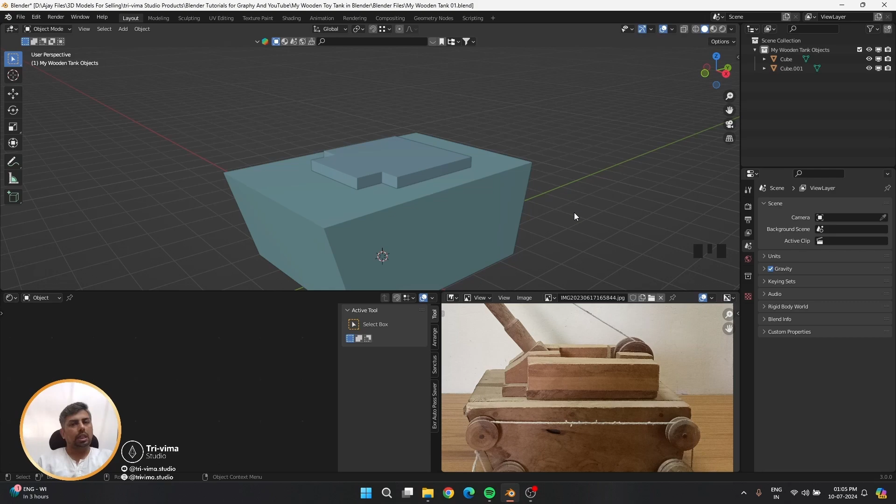There is a very simple way to create the next upcoming model, which is simple but a little smart. So let's try. First, I'll select this object here and switch on the wireframe so I can see the structure of it.

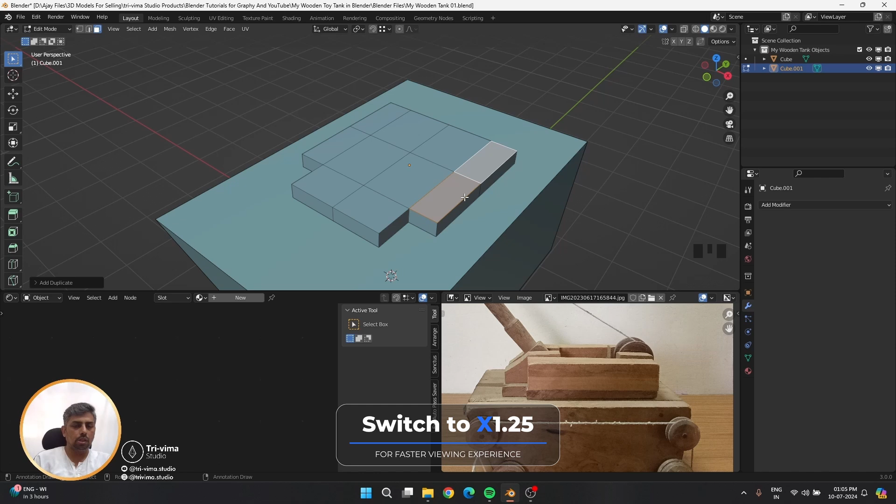Go to edit mode on this object, then go to face mode by pressing 3, select these faces, and press Shift+D. Don't move your cursor and press escape. This creates a duplicate polygon placed in the same spot, still selected. Then press P to separate the selection into a different object.

Go to object mode and select the new object. Now I can put a mirror modifier on this and see there's a correct mirror here.

Now I need to remove this middle edge by dissolving it. Then I'll use this section so I can see this one properly.

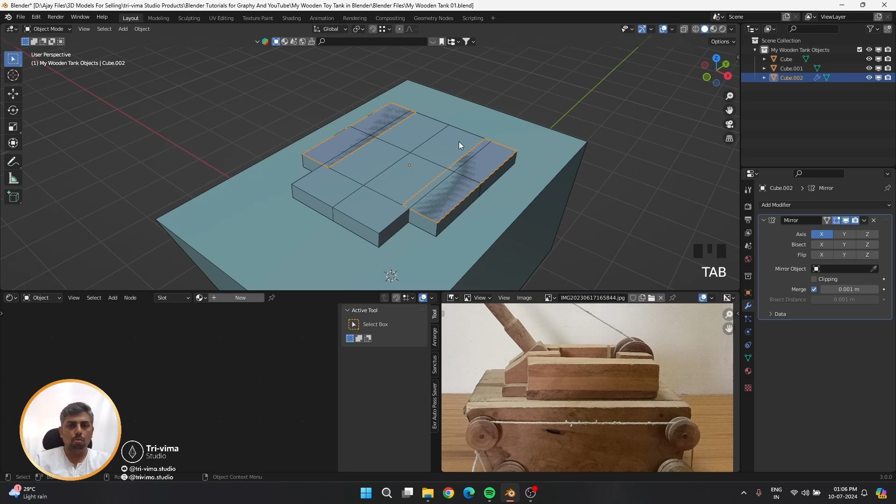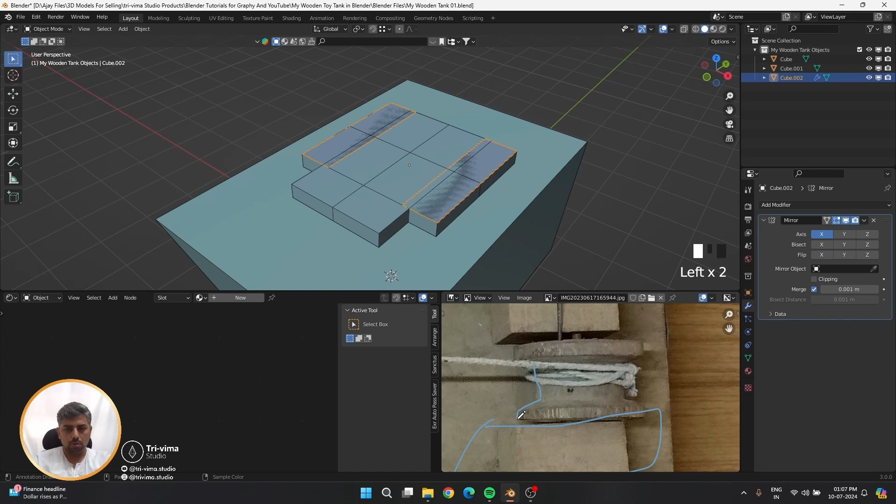See the other reference image also, this one, so we can understand what is going on. I need this piece, this piece, and this way the pulley is. You can see the pulley, where this bed gives space to tie the rope, and this is the structure.

So this way something we have to make. First we deal with this, then the pulley. Let's start - I did something little here. Now I need the same edit poly for this, and I need one more polygon for this and this.

Select this, Shift+D, go to X and jump it here. Let's snap this with G. Then again, snap off, GY and push it here. Position it like a square - it should appear like a square.

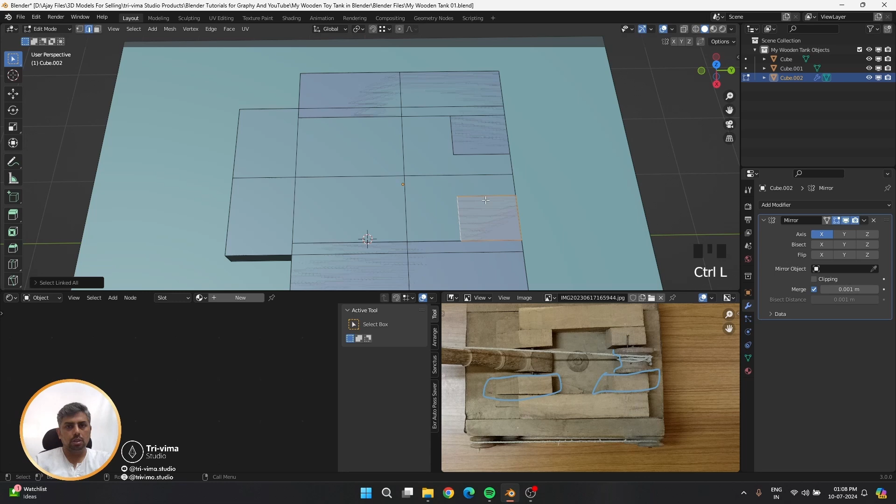Approximately is enough. Push this back again a little, maintaining this. Now I need this positioned here, so Shift+D and Y to place it. Switch off snapping, and push this further using E for extrude and Y.

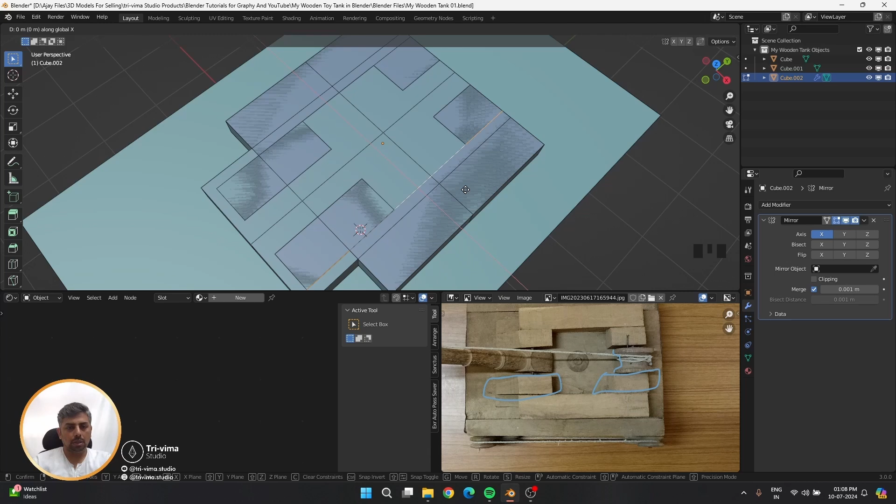So I did this. Now I'm changing the design a little, this and this one. Not shift, but G and X to grab and move it here. Now here also I will push it.

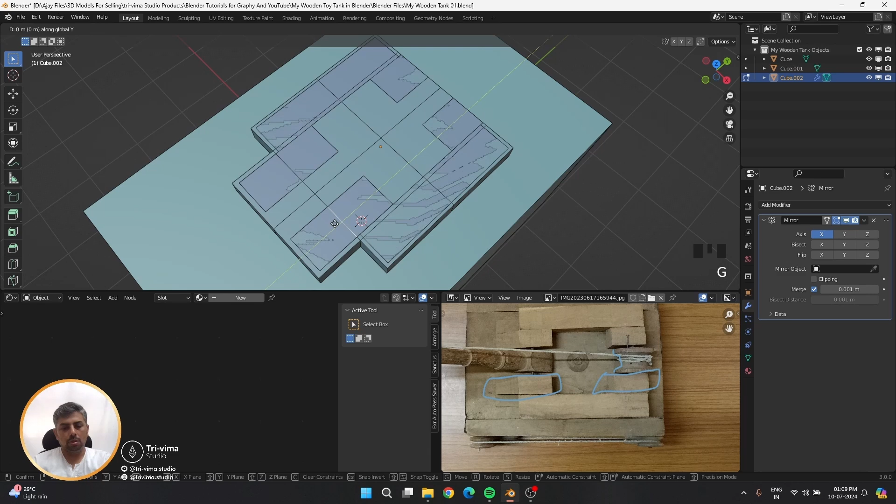Perfect, I think this is going good. Now this edge should be followed till here, I guess. That will be it, so this is it.

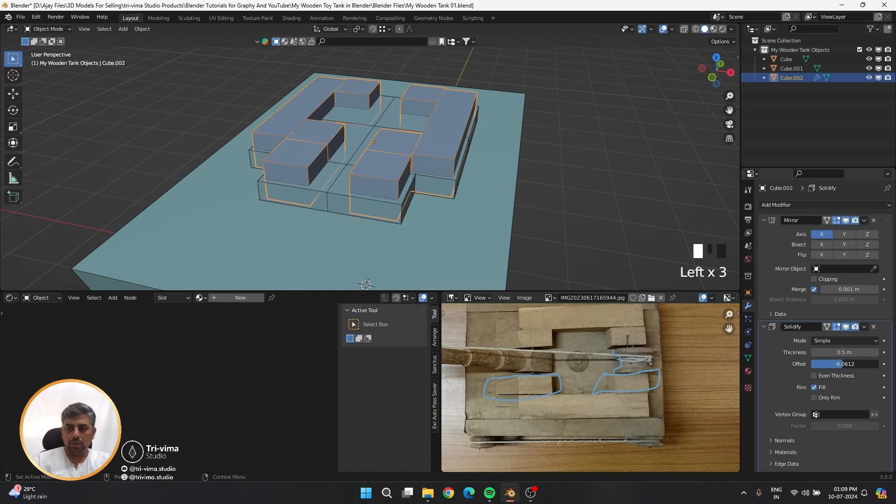Now I need a solidify modifier, but whenever I give thickness to it, it goes down, so we need to solve this. We'll change the offset - this is in minus, go to plus. Now I think the design looks fine.

Edit, GY to snap it here, so this will be perfect. Now let's apply this modifier. Make sure when you apply any modifier, you go to object mode, select the object which has that modifier, and click apply.

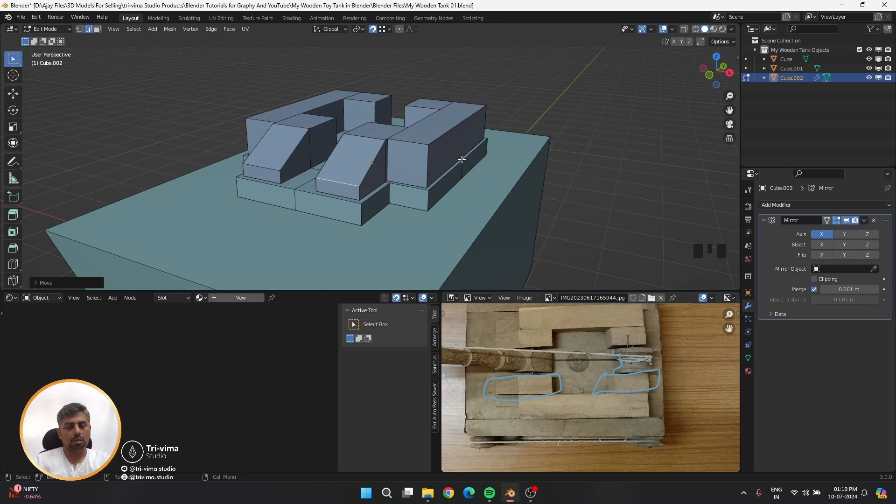After that, we'll do it again, then GZ, not snap, at least this one. This is correct, so here we have the structure. We're not doing any detail right now, just creating blocks, then we'll do the detail, because if you have a good block structure, you can deal with anything.

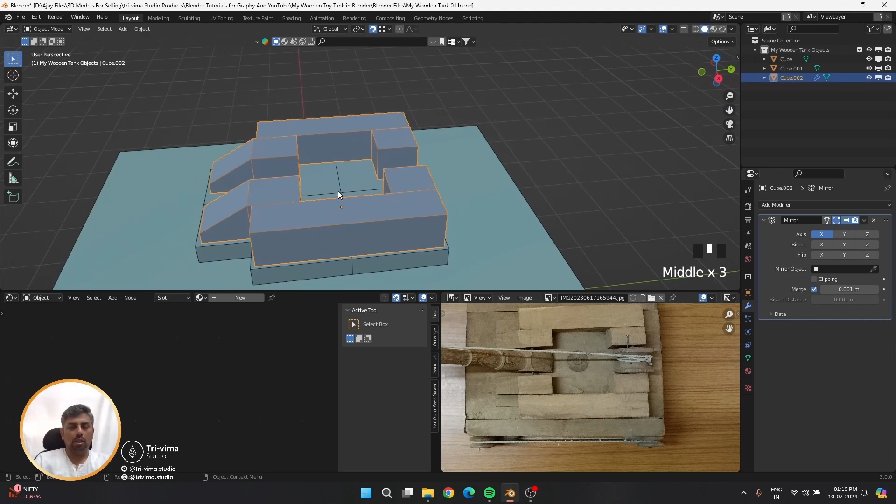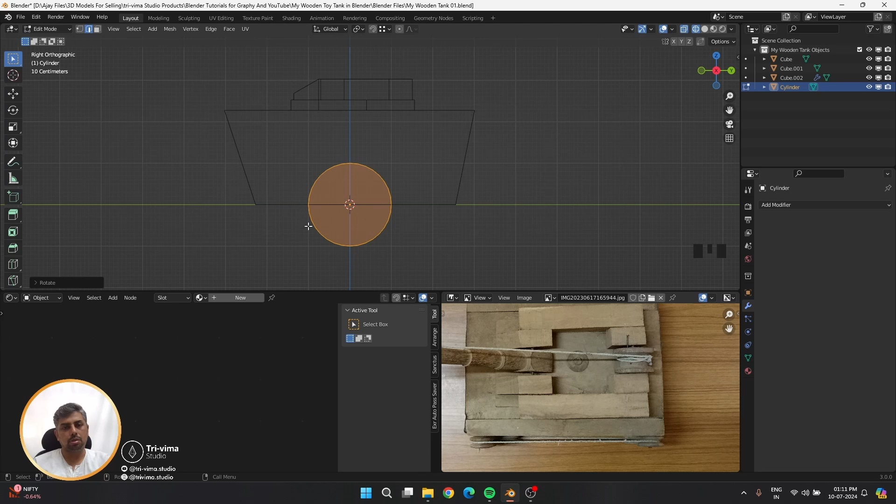So now we'll create a pulley. Let's switch off this wireframe right now. Then Shift+A, go to mesh cylinder, and jump into wireframe. Go to edit of cylinder, R Y 90 - this rotates all selected vertices of the object in the Y direction for 90 degrees. So now scale it down.

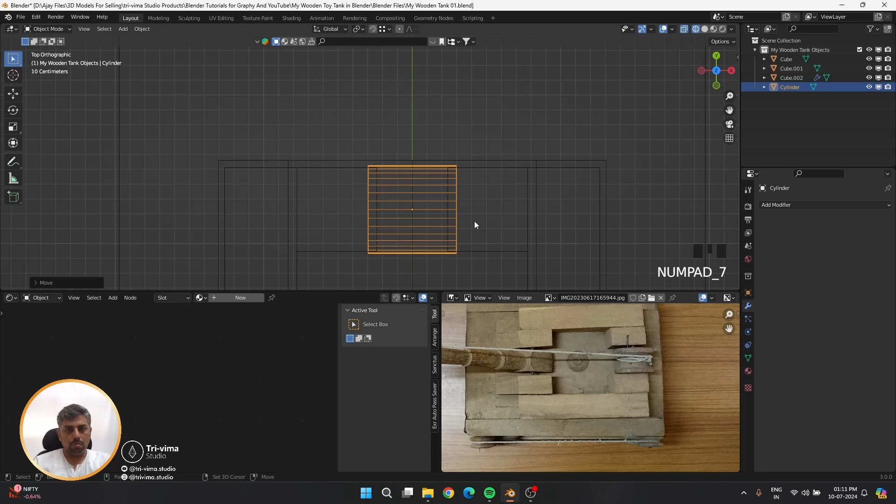And then put it here. So this is the pulley option. Let's have it. Now go to top view, go to edit, scale X, and push it here.

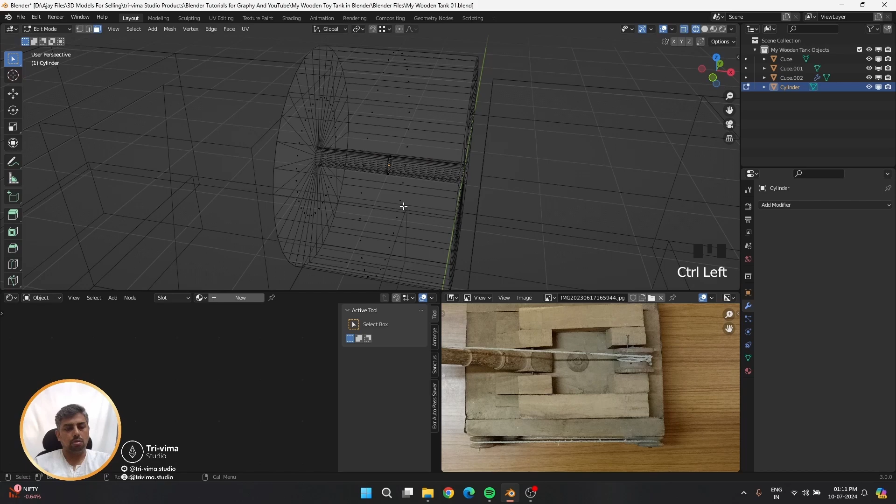Select these polygons, press I to inset. Let's have this inset to here and bridge faces - right click and bridge faces. Now deselect these edges or polygons. Let's have the edges here. First I need these two loop cuts to create.

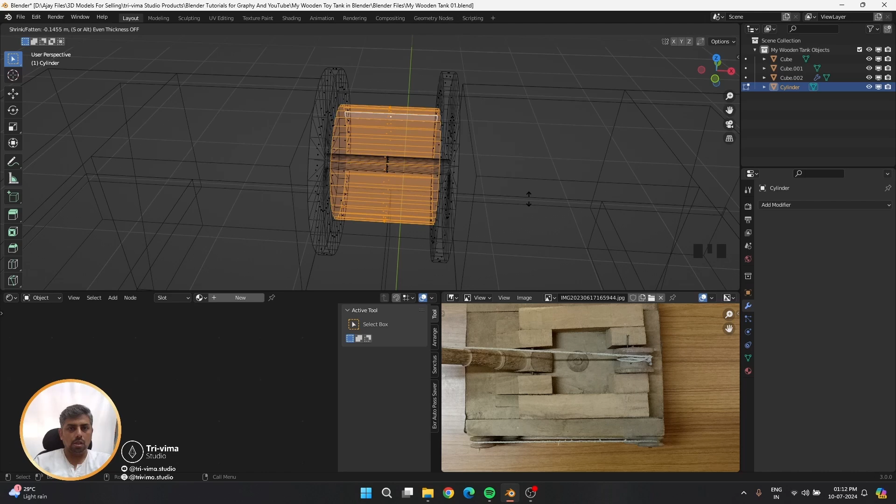Scale it till here, then select the polygon, Alt+E for extrude face along normals. Push it down and then scale it here. This is fine, let's see here.

I need this pulley to be perfect, so I think this is going good. We'll detail it later, but this is the correct one which I am expecting. Now this is the way I plan few blocking and all my objects in work.

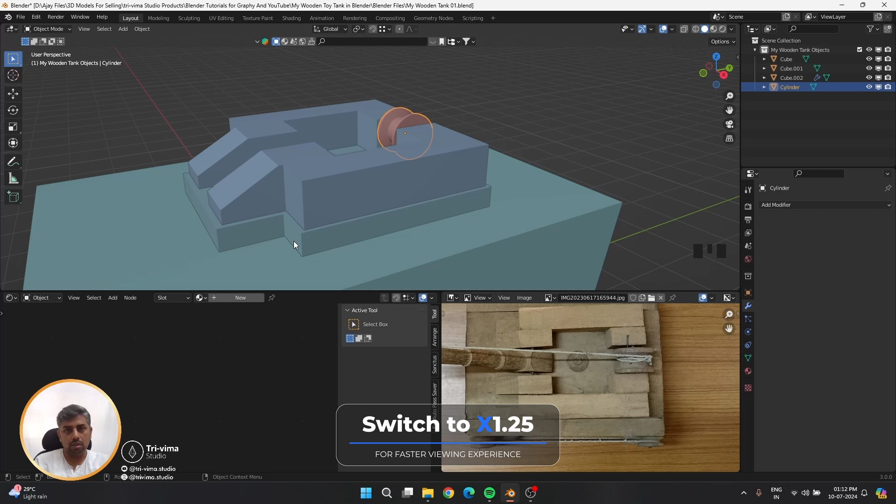In this condition, I don't need any references or tracing where I put an image behind and trace in front of it. So if you are good in modeling or want to be good in modeling, practice without references, but also make sure you have proportion in it.

You maintain that proportion. Keep practicing with things like ready-made, pre-made models which are in actual scale in Blender and all. Buy or download those, take one single object like a human character or a car, and in that reference, try to create without any tracing or putting those models behind your model. This way you will be practicing proportional knowledge.

Make it simply, start it simply, and then work in every direction. You will examine your model in every direction, whether I am wrong or right. You have to check every time you click once. Then if you found something, correct it, and you will slowly grow, building your proportion knowledge.

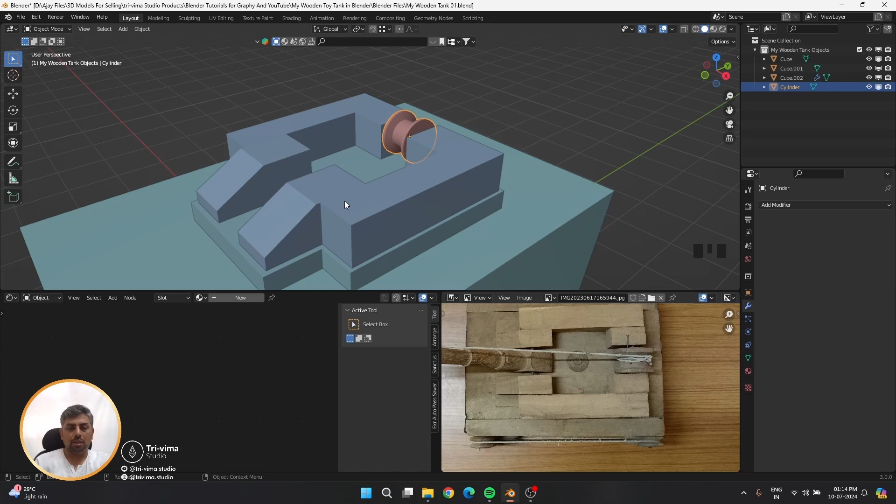That's very important, that you refer. If you don't know anything about modeling, start 3D modeling by reference images, tracing on those reference images. But gradually you also switch to non-reference images, meaning you don't need any images, you do it directly. I'm using the images just like this, but inside of it, not just on the model, so I can't trace it exactly. So here it is.